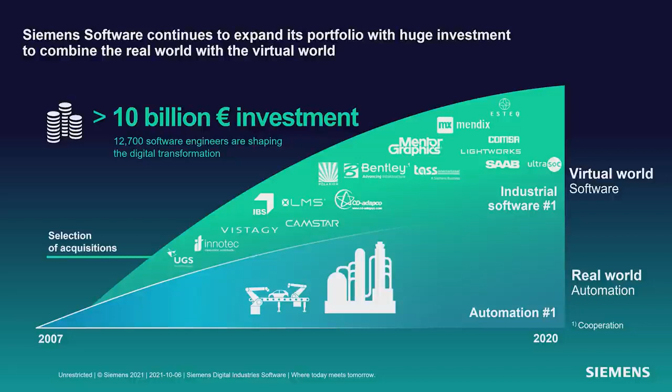One of the reasons we're able to do this is our investment. Over the past 14 years, we've invested more than €10 billion in bringing new functionality to Siemens. In fact, Siemens is one of the top 10 software companies in the world.

This allows us to bring you Xcelerator. Xcelerator is an integrated portfolio of software, services, and an application development platform that really speeds your digital transformation. So no matter what you're doing, whether it's mechanical, electronics, or manufacturing, we have you covered.

And it all starts with Solid Edge. Solid Edge is your on-ramp, if you will, to digital transformation. You're probably familiar with lots of Solid Edge capabilities for sheet metal, 2D drafting, etc. But maybe you need to go beyond that with the whole Solid Edge portfolio and Xcelerator, whether that's managing data, doing technical publications, simulation, or electrical—it's all there for you.

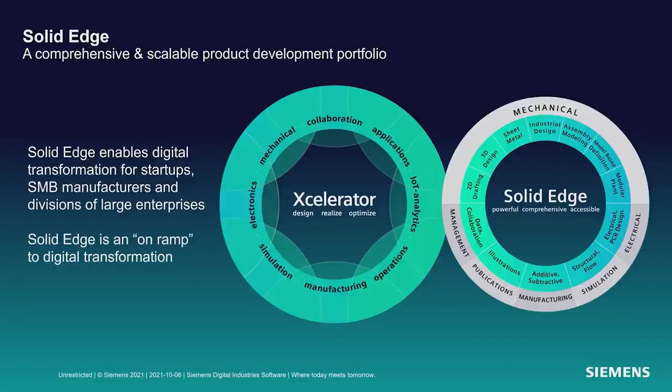And I love what Alan has to say: the software has a great holistic design approach, and that's what we like to see and how we can bring you more productive software.

So let's talk about Solid Edge 2022 itself. Solid Edge 2022: engineered to grow your business. There's so much in it, we'll only be able to cover some of it today.

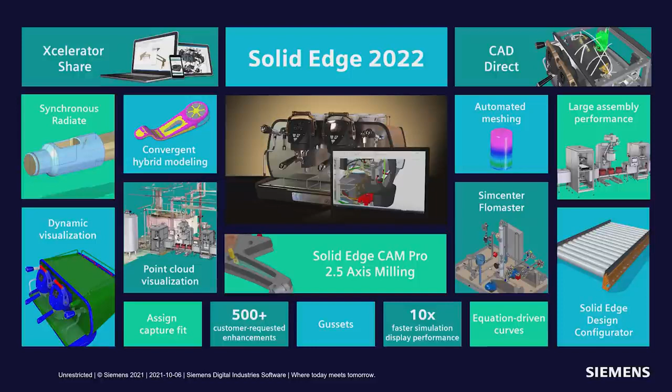Things like Xcelerator Share, allowing you to collaborate with customers and suppliers. Or CAD Direct, integrating CAD files directly from other systems into Solid Edge seamlessly. Point cloud visualization, for big scans of plants, letting you design your equipment in context of that scan. And Solid Edge Design Configurator, a whole new capability to configure your designs quickly and easily for your customers.

Now, as we go through our discussion today, we're going to be using two different data sets because there's just so much to see, such a broad range of functionality with Solid Edge. We'll be working with an espresso maker from Fiamma, a company based in Portugal, and also with a product from Bergner, a company based in Switzerland that makes chemical and pharmaceutical custom machinery.

So let's start by talking about mechanical design, and let's start with CAD Direct. CAD Direct lets you seamlessly integrate data from other systems into Solid Edge without translation, and automatically take updates.

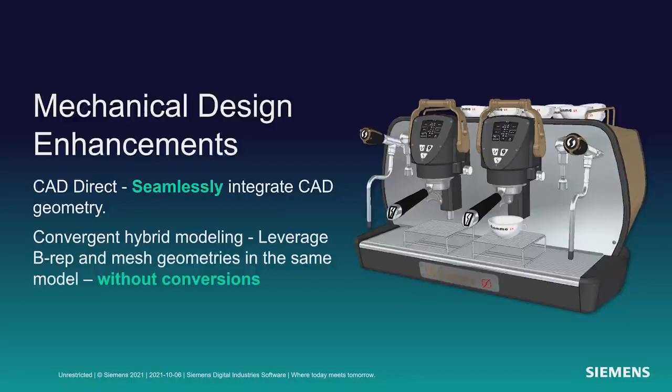We'll also talk about convergent modeling. We've been working on this technology for several years now, and it's getting very sophisticated—the ability to integrate mesh models with BREP or solid models in one seamless way. So let's look at that with Jeff now.

Thanks, Dan. First, we'll take a look at subdivision modeling. In this example, we will add support members to the base of the Fiamma espresso machine. The new subdivision bridge command can be used to easily connect edges or faces of subdivision cages and create a lofted structure between them. Here you see an example of that, where we'll select the faces of each subdivision model that we want to loft between.

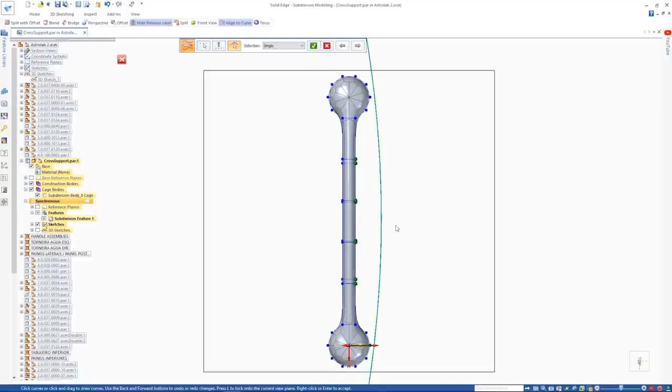Then we'll add the control curve to help us further define the overall shape. Next, we'll use the new Align to Curve command to further define the shape of the part, simply by selecting the cage vertices to define the direction and then picking the curve to automatically map those vertices to the curve. You can even sketch your own shapes and curves inside the context of the command, and even gesturing is supported for inking of your curves.

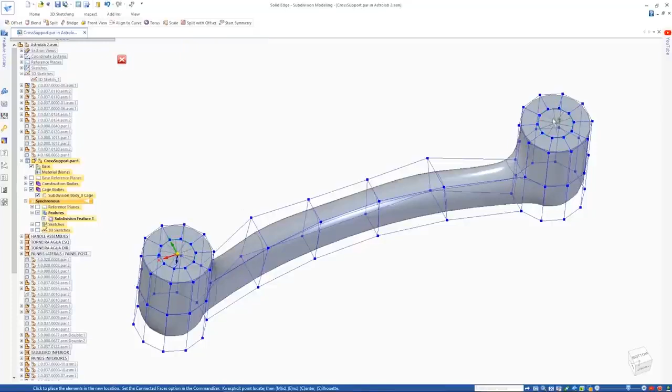Here we'll show another option called Split with Offset to add some pockets to support the rubber feet. A simple selection of the edges with an offset allows you to pull to create the pockets for those rubber feet. Next, we're going to replace the handle with a new design that's been 3D scanned.

This result is a mesh model that we import. We can visualize the mesh with the new Faceted Edge command. In this case, we'll clean up this model a little with the Remesh command.

Now faces have automatically been identified and the sketches are added to the planar faces of the mesh. We add a series of cutouts in order to reduce the weight and improve the appearance of the part. Notice the resulting geometry isn't faceted.

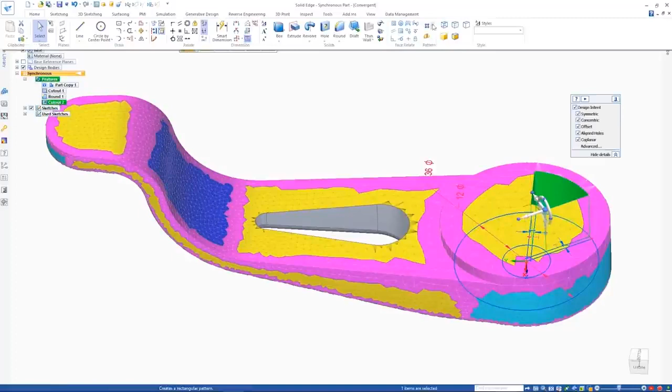Solid Edge now seamlessly combines mesh and B-rep geometry in the same body or part. We'll add additional cutouts to reduce the material. Once the cutout is complete, it can be patterned.

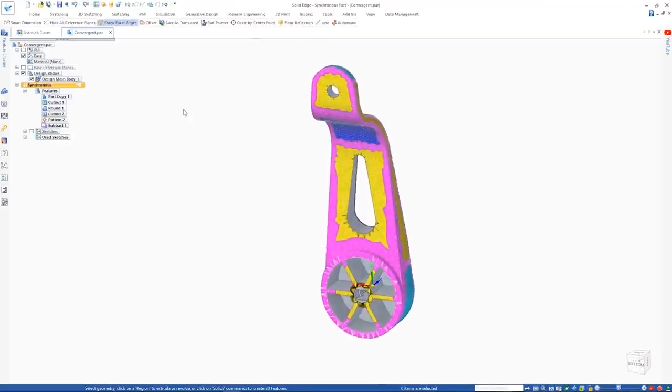Finally, we're back in the assembly where we'll replace the current handle with the new meshed handle. But you'll notice the mounting holes are missing from the component. This can easily be solved by doing a Boolean operation using the mesh model as the target and the components from the assembly as the cutting geometry. These new capabilities further enhance your ability to use mesh models in your design process.

Now we'll use the new component finder in the Solid Edge Pathfinder and search for the desired filter holder handle, which is designed as a family of assemblies. One of the versions is designed for a double espresso shot, the other is a single espresso shot.

Opening the drawing of this assembly, we'll use the new family of assemblies parts list to place a table and detail the parts used for each member.

Now we'll look at some enhancements to dimensioning in Draft. Dimensioning to virtual intersections or arcs of rounded edges is now supported. We can also choose to display projection lines to those intersection points.

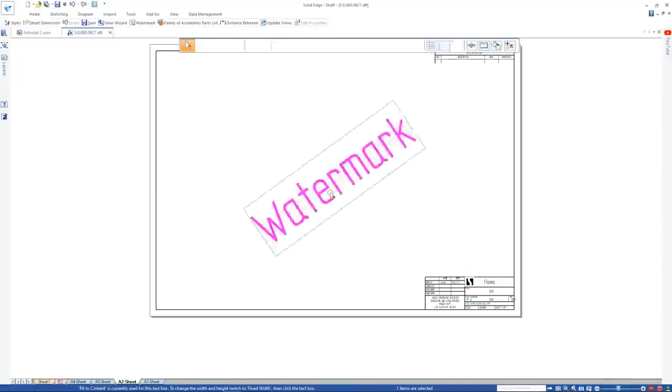Watermarks are also used to convey important information on the drawing. We'll change the existing one so that it retrieves the document status for the drawing property text.

The new CAD Direct command enables us to use foreign CAD data, geometry, and assemblies in Solid Edge directly without requiring any translation. The water boilers that you're looking at here were designed in NX. Once inserted into Solid Edge, they can be positioned just like any other assembly.

Since we need two of these, we'll simply copy one to create the second. Notice the boilers aren't quite in the right location. We'll go back into NX and make the changes needed to the mounting bracket such that they'll be in the right position. Since Solid Edge has associative links with NX, a simple update brings the changes in.

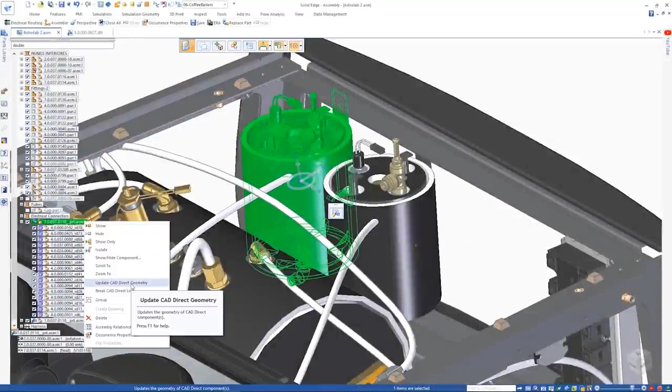Next, we'll look at electrical routing enhancements. Solid Edge now supports the display of bicolored wires, allowing us to change the display of this ground wire to be striped green and yellow. Various pattern types are supported as well, including single stripes, helical stripes, zebra stripes, and dashes.

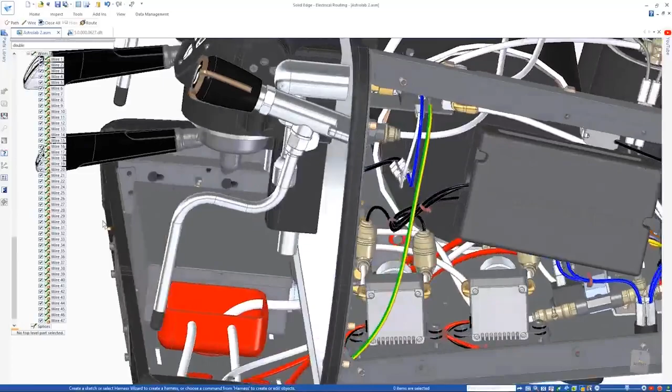And finally, KeyShot, the best-in-class rendering solution, also sees some impressive updates. Decals defined in Solid Edge may be automatically transferred, saving time and effort, which can be seen here on the logos and the cups in the digital scene.

Back to you, Dan. Thanks, Jeff.

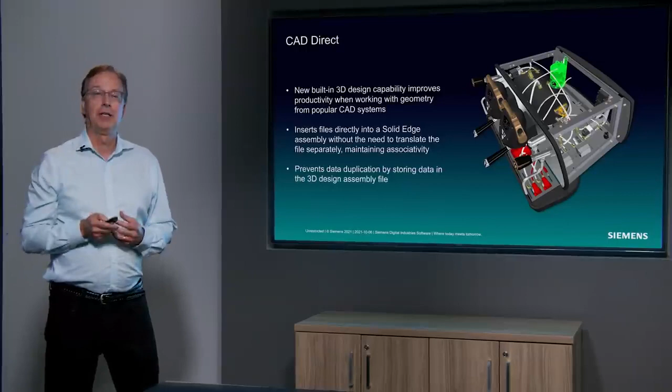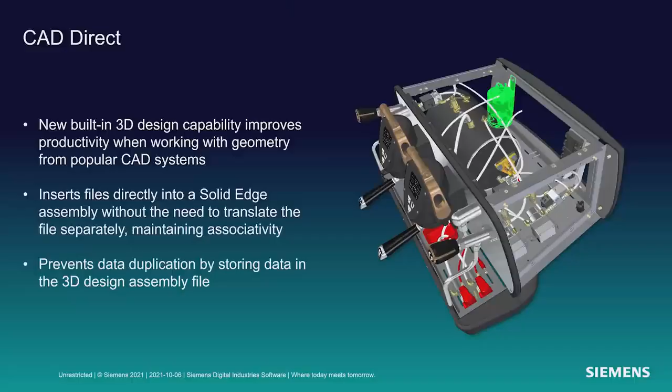Lots of amazing stuff in there, but I'm only going to highlight a couple things here that I think are real game changers. CAD Direct: you have the capability to get an NX assembly into Solid Edge directly, no translation. And when you make edits to that NX assembly, it comes into Solid Edge automatically. There's no extra files to manage. You don't have to worry about that.

It's all CAD Direct. And what about convergent hybrid modeling? You saw taking triangle meshes and B-rep solid models, pulling that all together into a single cohesive model, significantly reducing your design time.

Let's talk about some other mechanical design enhancements, some other great things in here. Point clouds: it's becoming fairly common to be able to scan an entire plant or factory and bring that data forward. We can now bring that data into Solid Edge so that you can design in the context of that factory or plant.

What about large assembly modeling? We see people first building parts, then assemblies, then whole factory lines. Assembly modeling in Solid Edge keeps getting faster and faster, best in the business. And synchronous radiate, an amazing new command within the synchronous modeling environment that allows you to deal with radially symmetric parts and edit those effortlessly. So let's take a look at that now, Jeff.

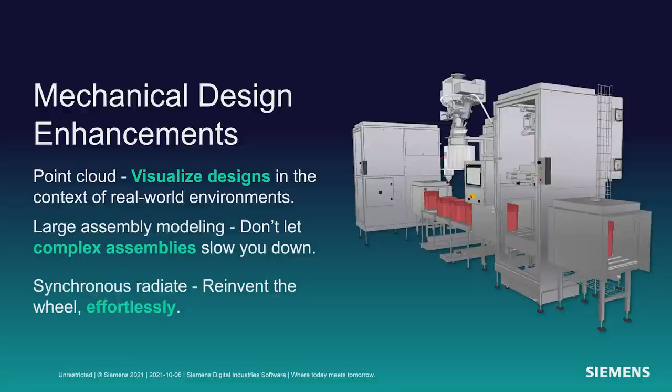The first thing we'll do is take a look at a new assembly preview mode. This mode allows you to very quickly open Solid Edge components and very large Solid Edge assemblies lightning fast. In preview mode, you can manipulate the view, show and hide components, and apply display configurations.

In this case, we'll isolate the most critical part of the model that we want to edit using a configuration. Then we'll simply tell the system how we want to open, and open only the components that are to be edited, saving you time and memory.

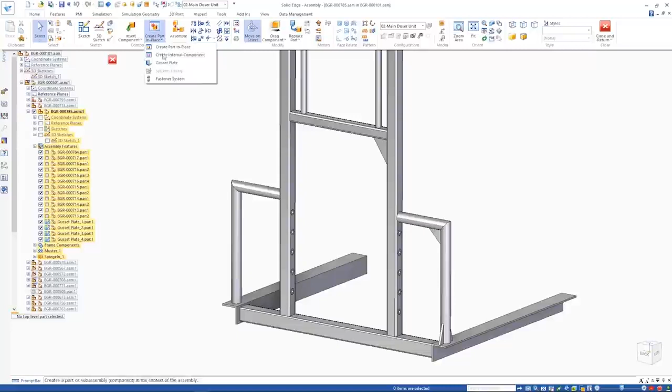Another time-saving enhancement is the gusset command. We now allow you to automatically add gussets to a frame structure. Here you can see the user interface. You can define these gussets in any shape and size that you desire. You simply select the frame element, position where the gusset is to go, and the system automatically creates the component there.

If we continue down the internal components theme introduced in the last release, we now allow you to create an internal component and actually create the model geometry directly inside the Solid Edge assembly. We've introduced this new assembly modeling capability that gives you the ability to create the entirety of a design without any need for an external file.

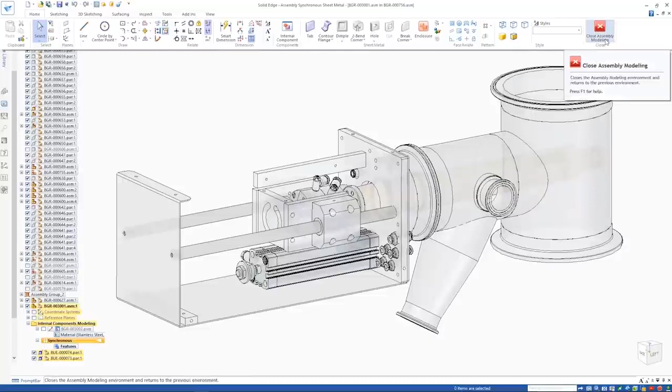Here we have a pneumatic cylinder which will be imported as an internal component. We need to add a bracket to this assembly, but since it's a purchased part, we'll just create this as an internal component, again saving the need for external tracking of files.

If you'll notice during sketching, a pop-up menu allows you to quickly access commands that are relevant to your selection. This is new for Solid Edge 2022.

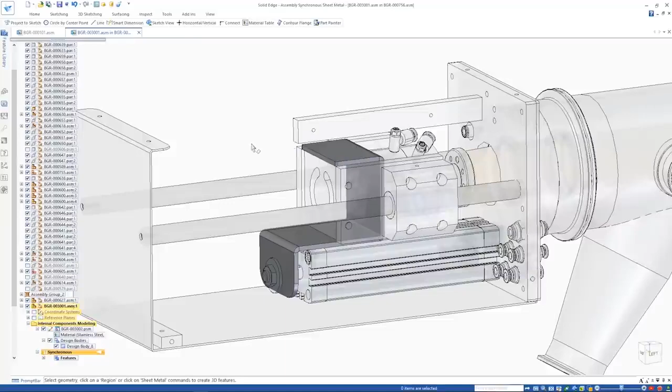So we've defined our sheet metal part. We also have to give it a material definition and a gauge definition. In addition, we're able to create geometry and reference the components from the assembly, whether they're internal components or real components in the assembly. So again, we're defining the material gauge for the sheet metal component, and we've defined this component completely inside the context of this assembly.

You're also able to drag the component, doing animations using both internal components as well as the real component combined.

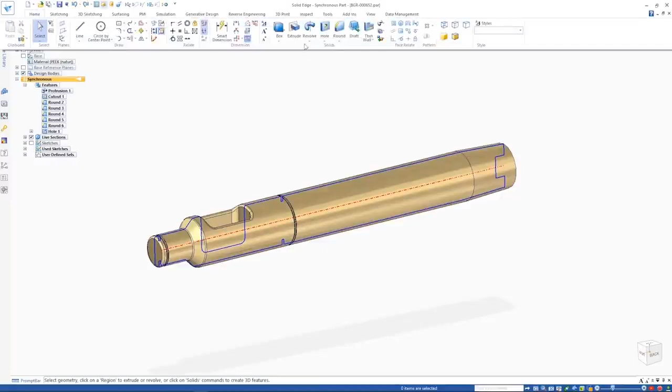The new component finder speeds up the process for locating parts within the assembly. You simply key in the name and it finds the list quickly. Here we found a shaft, and we use the new radiate command to edit the radius or the diameter of the shaft component. You simply select the shaft, putting the component in the select set that you wish to change, and then Synchronous does the rest.

In this particular example, we want to include the pocket in the radiate and the offset option. Simply selecting that pocket and including it allows that to be done.

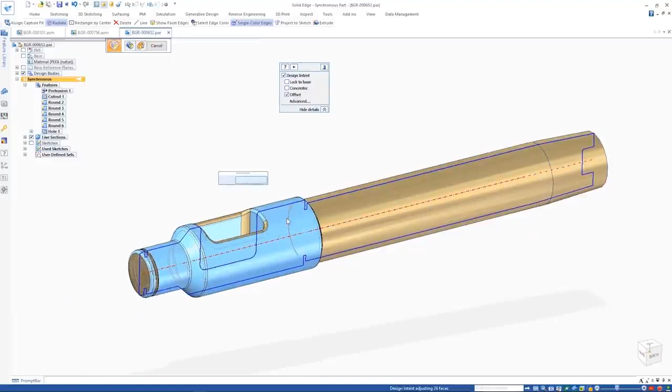A new Assign Capture Fit command allows relationships to be predefined on a component while in the context of the part. Here you can see that Capture Fit relationships already exist. We'll add a new Capture Fit to the collection and save it to the component.

When I place the handle into the assembly, all you have to do is select the component and select the mating components that you want to mate it to, and the handle automatically snaps into place. It's as easy as that. Here's another example where we have a handle that needs to snap to five new locations. Again, the Assign Capture Fit makes it easy.

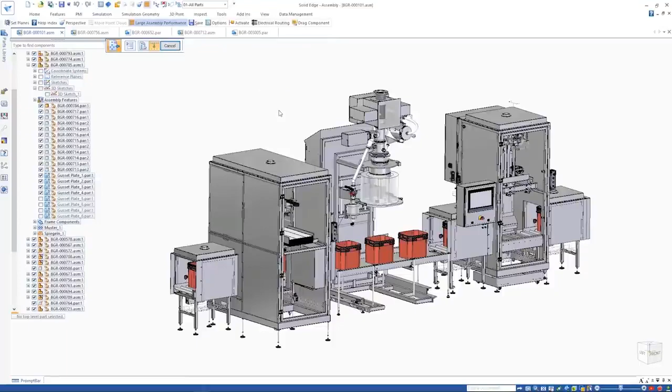Solid Edge now has the ability to place point clouds within the context of your design. This allows you to reference and visually indicate where your components will be placed inside a large assembly. Solid Edge supports multiple point types and then allows you to position your component inside the context of the plant design. The point cloud can be easily repositioned.

Clipping planes can be used. You can even measure to the location of the point clouds relative to your design. Here you see that the tank component was in the wrong position and it was moved to match the point cloud and the plant definition more precisely.

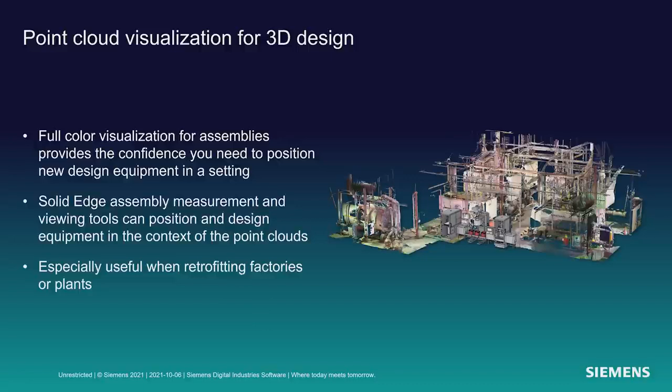And we see that our customers really love this new technology. So Benjamin at Bergner, for example, eliminates a lot of tedious manual effort. It's just so much easier with the new point cloud technology.

And what about large assembly modeling itself? An order of magnitude increase in large assembly modeling performance. So you have that preview mode where you can very quickly bring up the assembly, even very massive assemblies, decide what you want to work on, and then just bring in that bit of the assembly to really improve your productivity.

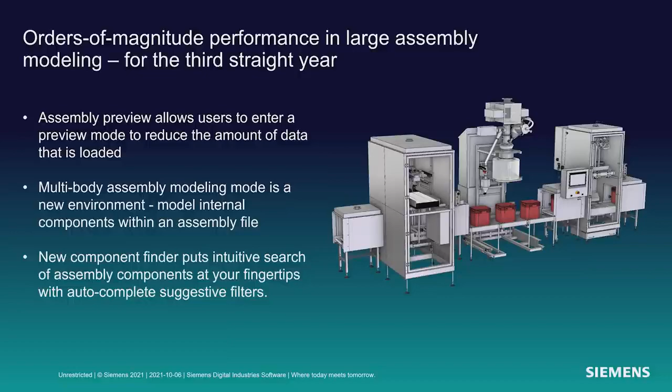And we see that folks are already taking advantage of this. Our beta customers have been using this, like Luca Carminati at CMS, doing much faster work and saving a lot of effort on their designs.

And what about synchronous revolve? Really amazing stuff if you're working on those axisymmetric parts. Being able to make edits without having to do any extra effort happens almost magically. Great stuff.

Okay, next up is Solid Edge Design Configurator. I'm very excited about this. If you're doing any engineer-to-order or configure-to-order type of products, the ability to very quickly change your designs and have new quotes very quickly. Let's take a look at it with Jeff.

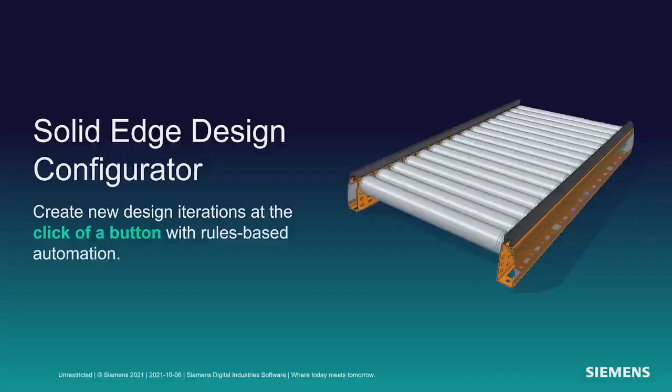Thanks, Dan. The new Solid Edge Design Configurator allows you to design multiple product variants directly in the context of Solid Edge. In this example, we'll configure a variety of conveyor designs. The first step is to select the component to be configured. The next step is to define the master input parameters of the configuration. In this case, it's the length and width of the conveyor plus the pitch of the rollers. Values can be easily edited for any parameter, and images can be included to help the end user identify the needed inputs when configuring the model.

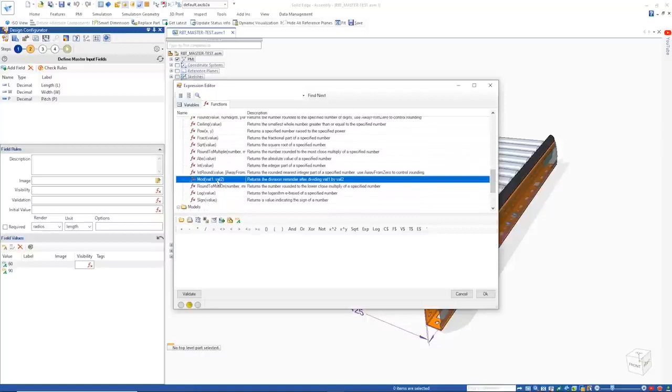Defining a new input parameter for the pitch of the conveyor, we will quickly configure the name, type, label, and render style to use radio buttons. The pitch value of the conveyor can be customized between 60 and 90. However, since different lengths of the conveyor require different pitches, visibility rules need to be applied. This is done by making use of a simple expression to define the intelligence. Here, the rules are being validated to ensure consistency and proper definition have been made.

Here, the function is going to be copied and pasted to allow you to easily reuse formulas without having to include them again. Skipping to the last step of the configuration, we can see the configuration form is properly created. Next, defining the rules for the process.

Here we have multiple rules to drive and configure the connectors at the bottom of the conveyor. We will use a combination of simple condition and expression rules and a truth table to work out the number of positions of the connector. All rules can be quickly validated.

Finally, we specify the actions to be taken. Here, variables are set and components are replaced to satisfy the input parameters.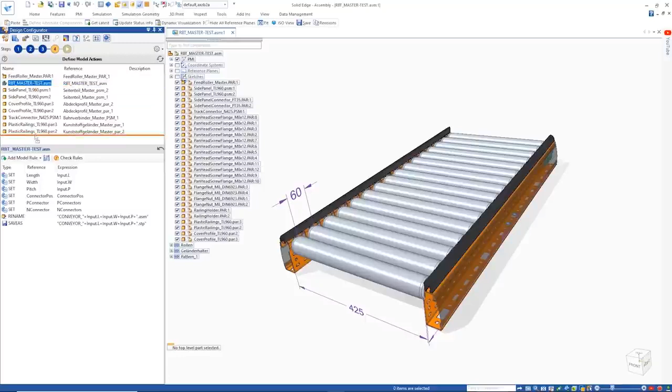A rename model action will ensure our final assembly will be renamed appropriately and also create the other necessary outputs, for example, a step file as shown here. Now we can run it quickly and create as many configurations as needed. A newly generated configuration can easily be shared with Pack and Go. The configuration logic is all stored within the CAD model. There's no need for any further plugins or external resources.

And with that, Dan, I'll hand it back to you. All right, thanks, Jeff.

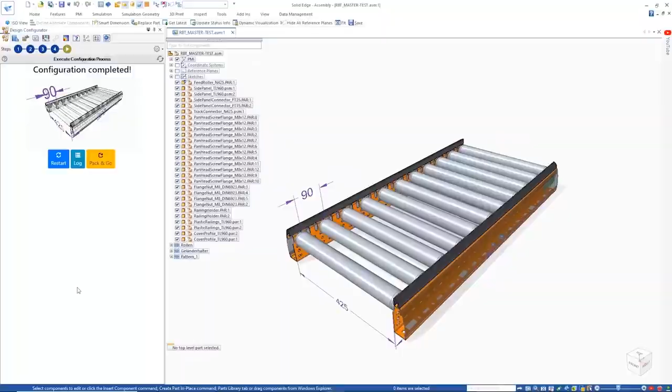So as you see, with the Solid Edge Design Configurator, you can accelerate your configure-to-order and engineer-to-order processes and create compelling sales proposals. You're also going to see that it really error-checks for you and creates a nice dialogue for your users to interact with so you can very quickly configure new products.

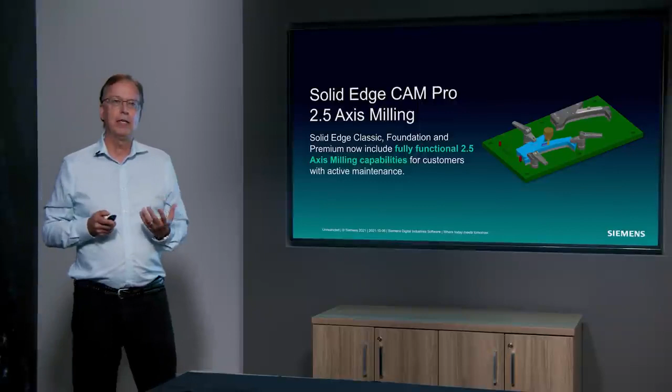What about CAM, Solid Edge CAM Pro? Tried and true technology developed over the last 40 years. A lot of users are using it today and enjoy the benefits of it. But what if that technology was available to all of you, all Solid Edge customers on maintenance? That's what we want to introduce to you today with Solid Edge 2022.

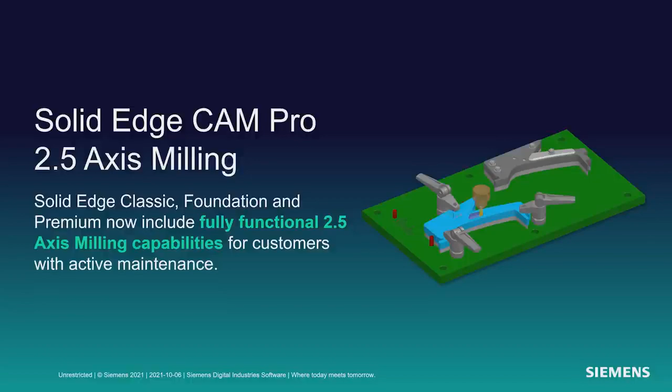Jeff. Thanks, Dan. Here we'll be using Solid Edge CAM Pro to create the manufacturing toolpaths for the rear legs of the Fiamma espresso machine.

First, we'll use the Solid Edge assembly tools to create the shape to represent the stock parts, and also the parts that form the fixture assembly, which includes the standoff plate as well as additional fixing holes from the standard database. We will also make use of supplier catalog in 3DFindIT to get the appropriate socket head cap screws to be used to fix the component in the fixture. So as you can see, Solid Edge is a great CAD for CAM tool.

We'll need to machine this in two separate steps. Step 1 is to mill the pocket and drill the holes, and step 2 is to machine the profile.

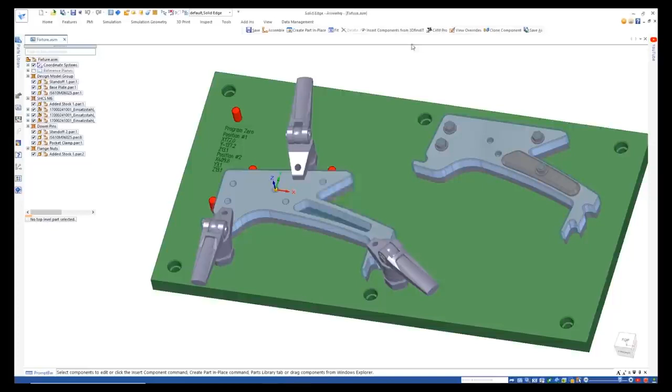One click will send the entire assembly to the Solid Edge CAM Pro application. Associativity is maintained to the complete assembly, so if there are any last-minute changes, we can quickly update them and continue the NC programming process.

New for Solid Edge CAM Pro is the ability to create adaptive roughing toolpaths for 2.5-axis operations. This is included at no additional cost. These are faster than traditional toolpaths and extend the cutting life of your tools.

Notice the advanced graphic capabilities for validating your toolpath.

Here we'll create spot drilling operations for the 5 holes in the support. Notice the graphical pop-up hints that help us with operation selection.

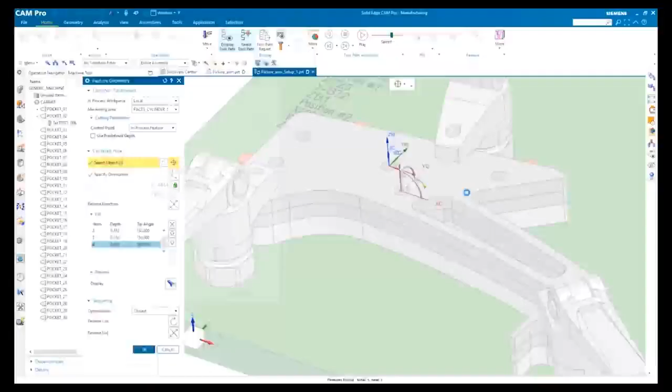Graphical helps are also available for geometric selection. Each time we select a hole, we get a preview of the machining that will take place. Again, at any point in the process, we can get visual feedback on our decisions.

Now that our CNC program is complete, let's run through the whole visualization process. Notice you get to completely visualize the entire machining process before committing it to machining.

Of course, no job is finished until it has been post-processed for a specific machine. That's where PostHub comes in. It's an online database of over 1,200 post-processors. You can easily filter and find exactly the one you need. Also, PostHub is constantly updated, bringing you the most recent tools.

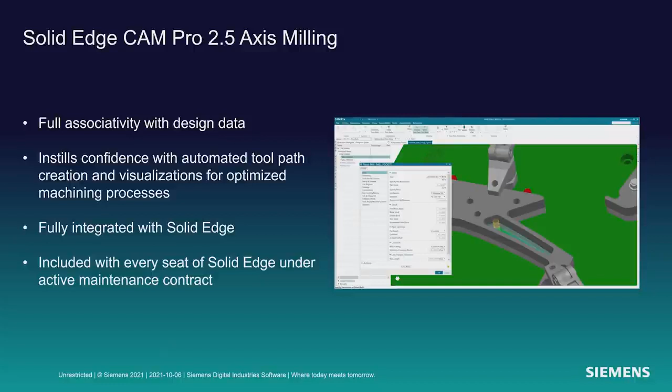And Dan, with that, I'll turn it back over to you. All right, thanks, Jeff. I'm really excited about this. There's a great heritage in Solid Edge CAM Pro and our machining technology over the last 40 years. Many people enjoy that technology, but now every Solid Edge user who's on maintenance can enjoy that technology and work with Solid Edge CAM Pro.

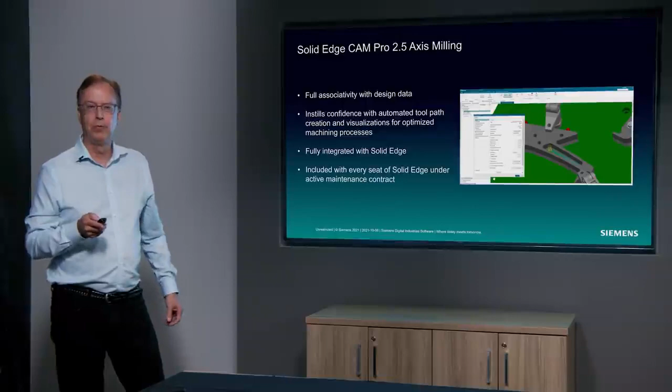Next up is Xcelerator Share. I'm super excited about this. It's a functionality in Solid Edge that allows you to collaborate with colleagues, suppliers, customers very easily. Nothing for you to set up, works on all sorts of devices. So let's take a look at that, Jeff.

Thanks, Dan. Xcelerator Share allows you to import your CAD models into a secure cloud location. Within that context, you can view, rotate, show/hide, do 3D sections, and even do measurements and markups. Here, a reviewer has identified the need for some change in the design.

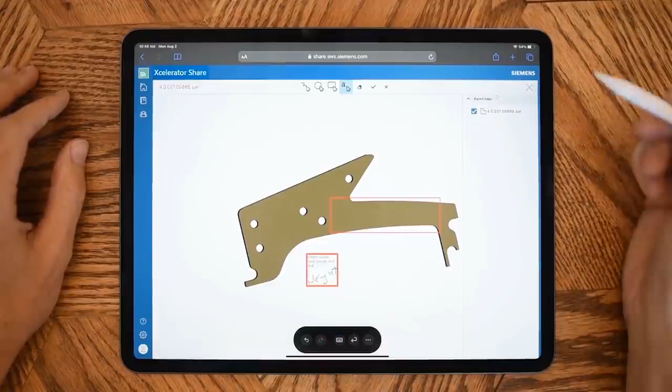The location of the change is identified by a sticky note and a place describing the needed change. Xcelerator Share offers maximum traceability, as all markups are recorded, enabling conversations back and forth on any of the issues you're tracking. It also records who made the markups and when. We can also easily go back to the markups at any time.

Simply save your markups and send them to the designer for review.

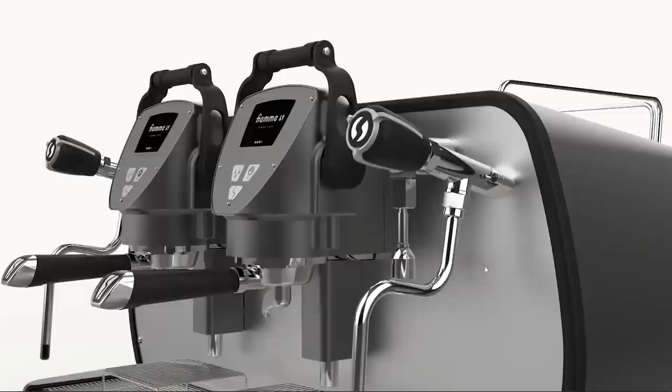With Share, you can also directly connect to Solid Edge, synchronizing your data from your desktop to the cloud. Here we have the same project on our desktop, represented simply as a folder. Any data that we have in this folder will get synchronized in the background.

In Solid Edge, we can securely sign in to Xcelerator Share and see those same cloud-based projects. The Espresso machine can be opened and we can go right to work on the part in question. The designer can easily access that same markup in the cloud directly from within Solid Edge.

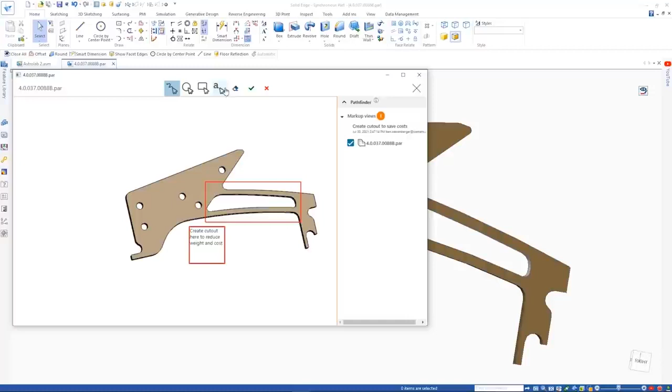Once completing the change, another markup continues that two-way conversation and collaboration with other stakeholders so that the issues are tracked appropriately.

Another great feature of Xcelerator Share is the ability to share a project with anyone. Simply enter the email address of the person with whom you'd like to share and choose their access permission level. Here we can choose View, or View and Download, or Edit and Download, depending on how you want to protect your intellectual property. We'll share this design with one of your colleagues and our customers and give them the appropriate access.

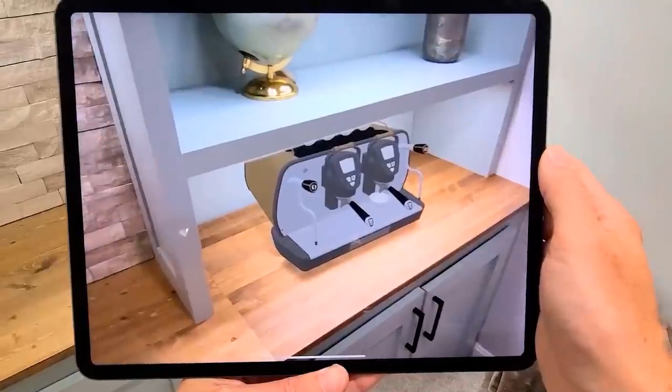Finally, with the Share Augmented Reality feature, you can see exactly how your designs will look in the real-world environment. Snap the design onto any surface seen in the camera lens at the correct scale. Finger gestures can be used to manipulate the model and easily visualize what your design looks like in a real environment. So back over to you, Dan.

Thanks, Jeff. All right, Xcelerator Share. Really great stuff. Next generation cloud-based collaboration that allows you to work inside your company with colleagues, or work with suppliers, work with customers. Nothing for you to set up. Works on every device. So whether you have a Mac or an iPad or a Chromebook, it works on all those devices with no special setup.

And you saw the ability to write notes that are automatically converted to text, and share those markups. Very exciting stuff.

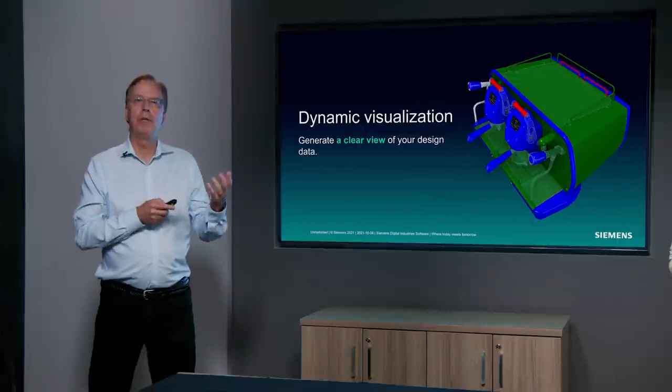Next up is dynamic visualization. You make complicated products, large assemblies. How do you know which parts are from which supplier, or which parts are of what material? Dynamic visualization will help you with that problem. Let's take a look at that now with Jeff.

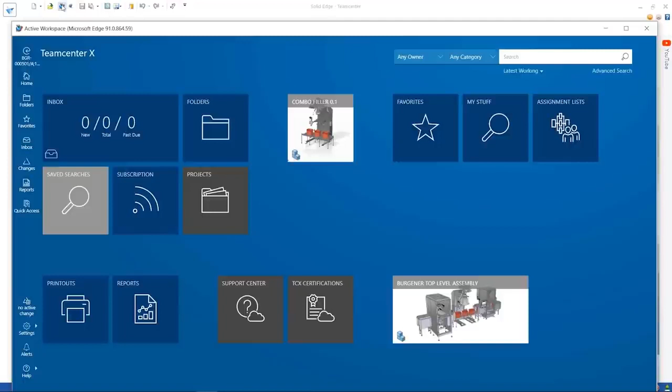Thanks, Dan. Dynamic visualization gives you great capabilities to generate visual reports of your assembly. So what we'll do here is open a Solid Edge assembly using Teamcenter Active Workspace, and create a visual report based on the component supplier and material definition. The first thing you'll do is add columns to the user interface that you want to filter on. Here we've added suppliers and material, so for each of those we'll filter on the particular material and supplier we're interested in visualizing.

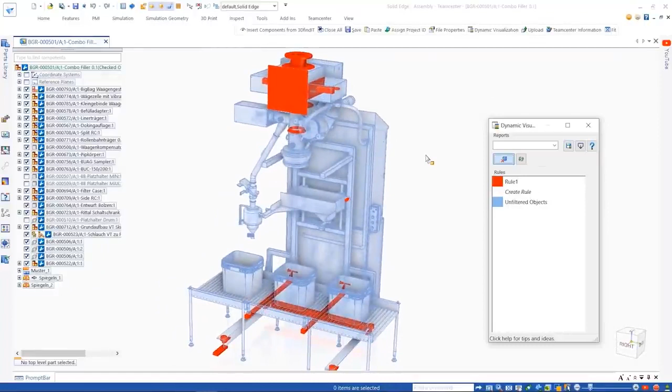Once the rule is created, you simply apply the rule and the model changes display to show you the rule definition. Here you can see in red the components based on that supplier and material selected. You can also export these rules and import them into various assemblies.

Here we have a rule that allows us to identify which user created which components. We'll modify that rule to allow us to identify work in progress as well as components created by Pat. We can highlight those, select those, and then go into edit mode. Here we'll see we need to add a warning light to this box.

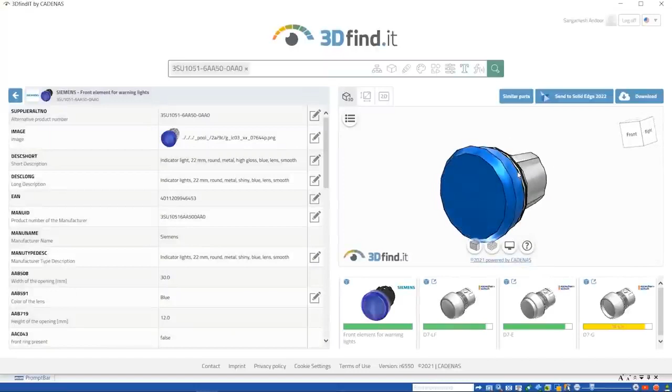We use 3D Find It to find the particular light from the particular supplier that we want. Once we've identified the right one, we'll generate the component in Solid Edge. But in this case, the component already exists in the Teamcenter database, so instead of replicating it, we'll simply reuse what's already there.

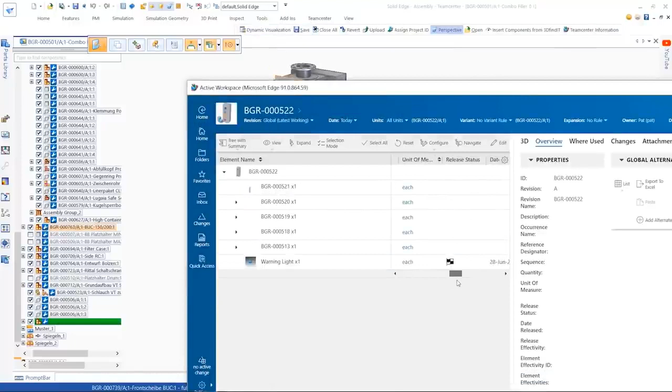Also in Solid Edge 2022, we were able to take advantage of the project definitions within Teamcenter. Here we can see we've assigned the components to a particular project in Teamcenter.

The Solid Edge built-in data management also supports dynamic visualization. Here again, we'll display the assembly coloring based on material type to ensure that we have the proper materials throughout the model.

So again, the rule is applied, visually it's displayed, and you'll notice that the red handles should be green. Those should be stainless steel and not aluminum. So we'll send those back to the designer to be reworked and the proper material applied.

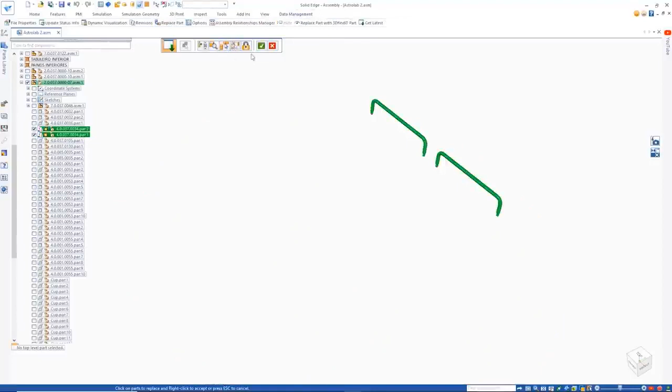Once applied, we can then do an auto update of the status, and the system will automatically show us the status and update to get the latest component. In this case, the handles are updated with the proper material. We will rerun the same rule, and you'll see that now the handles are green and therefore in the correct material.

Another nice enhancement is that we've modernized the file properties dialog. You can see here it looks much more user-friendly and lets you easily create new custom properties as shown here.

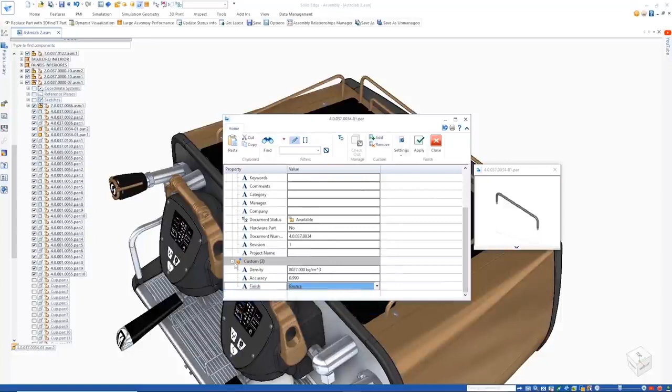This next example will use replace part with 3D Find It. 3D Find It has the ability to take a component and use that component's geometry to search the catalog database for similar components. Here, once the component is found, we identify the supplier that we desire, and with a few simple clicks, that component is inserted into the assembly, replacing the previous geometry.

And lastly, we've added Pack and Go directly to the Windows Explorer UI, making it easy for you to share your data without having to open the assembly within Solid Edge. And that's it, Dan. Back to you.

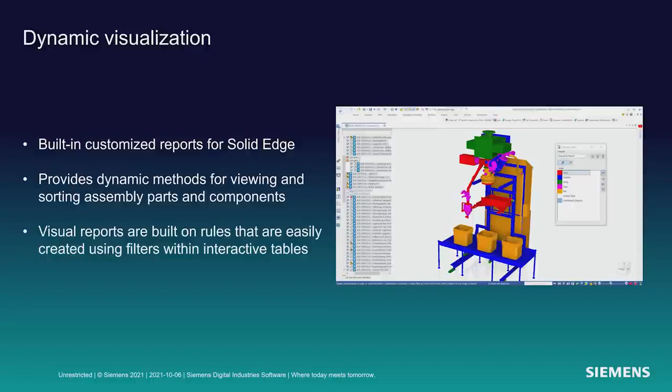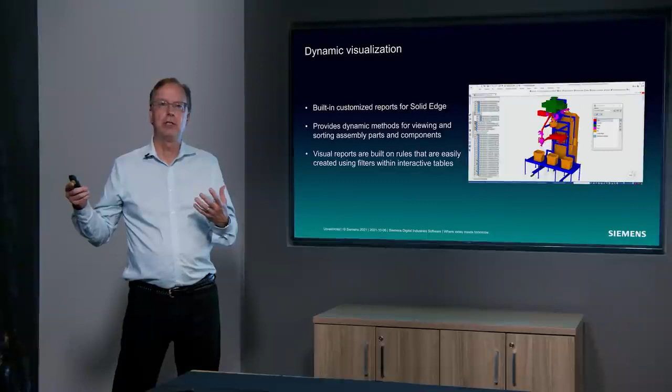All right, thanks so much, Jeff. So many good things you saw in there with 3D Find It and the ability to replace components, search directly using geometric shapes, and so on. But I want to highlight to you this dynamic visualization. Being able to say, what supplier do I have for the different components? Color code for me all the things that are stainless steel. Color code for me all the parts that are in work. Amazing technology that would save you a lot of time and money.

Next up is Solid Edge Simulation. We have some great enhancements in there, some game-changing enhancements in terms of the ability to remesh parts using the body mesh command, and some other great tools. Let's take a look at those, Jeff.

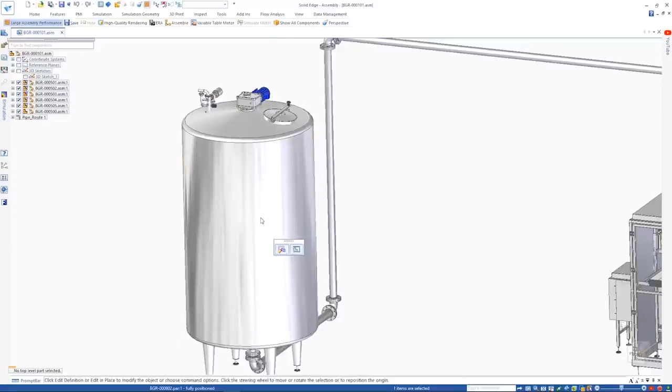Thanks, Dan. We'll start by looking at a new boundary condition allowing the user to apply hydrostatic pressure to a model. So we'll apply a configuration that gives us the geometry of interest. Here we want to look at this tank on the left and do an analysis, assuming that tank is filled with liquid.

So we'll create a hydrostatic study, and in the definition of the loads, we'll use the new hydrostatic pressure command. All you have to do is identify the surface to apply the load, identify the depth of the liquid in the tank, and then provide the density of the liquid within the tank. Solid Edge will do the rest.

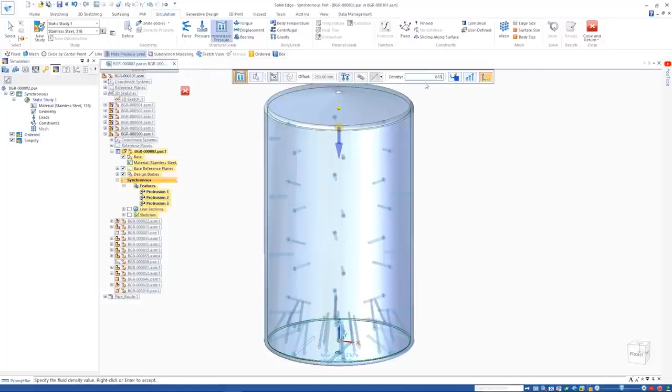To finish the analysis model, we'll apply constraints to the bottom of the tank and then perform the meshing and analysis as needed. Notice on the new mesh dialog a body mesh. This is proprietary technology from Siemens that does a really good job meshing complex models. Some things that couldn't be meshed before can now easily be meshed much quicker and much more reliably than in the past.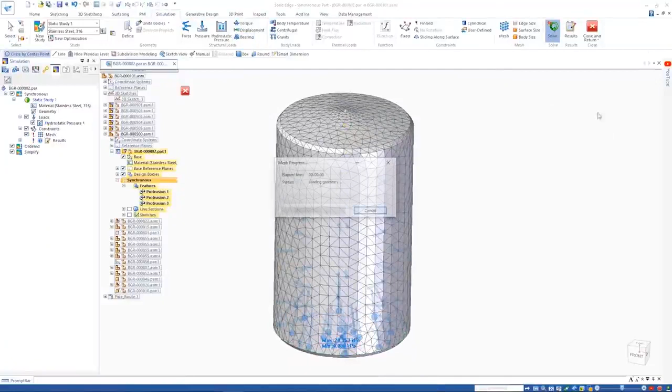So here you see the result of the hydrostatic pressure load in this tank. We'll change the liquid level in the tank and run the analysis again just to validate that this tank will withstand the pressure exerted on it in production. There you see the animation of the stresses, and they show up in the obvious place at the bottom of the tank where you might expect.

Another great enhancement we have in simulation for Solid Edge 2022 is improvements to beam meshing. Here we're taking a frame structure and creating beam elements for the finite element analysis. Notice that the rigid connectors were automatically placed. We've improved significantly our ability to create those connectors automatically without any user intervention. Here the user has selected the bottom and changed some of the parameters to get the rigid connections correct. The bottom of the frame is then fixed, loads are applied, and the analysis is run.

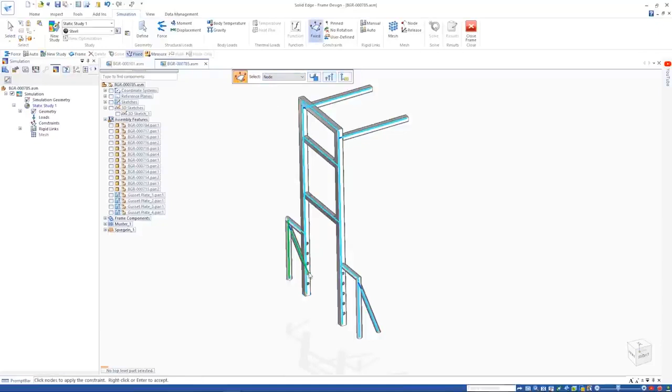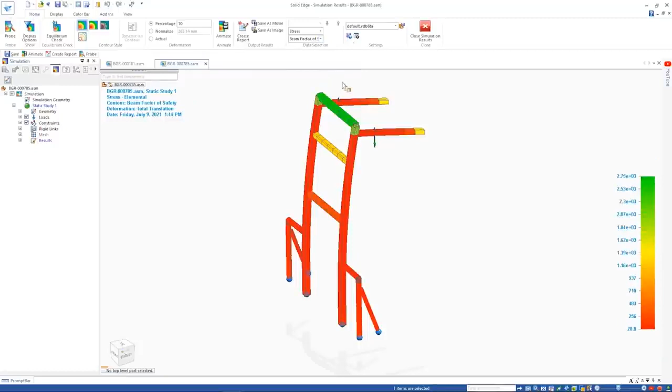Once complete, you'll see some enhancements to the output, to the post-processing for this model. We can now post-process and display contours using von Mises stress, and we've also improved factor of safety stress contours based on those same von Mises stresses.

Now back to the assembly, we're going to do another analysis on the pin within this assembly. You notice this pin is a mesh model. Simulation can now perform analysis on mesh models. You simply apply the boundary conditions, the loads and constraints where needed, and run the analysis. Here you see the result for the pin on this mesh model.

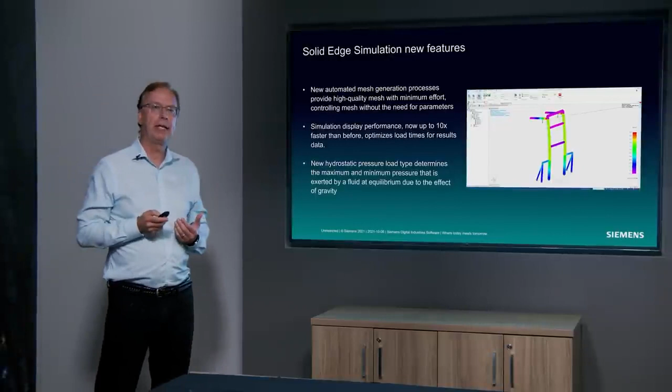Lots of great new things in there. Obviously, the hydrostatic pressure load takes a lot of work out of the process for you. The way the beam elements are automatically connected together, great stuff. But also that body mesher - you can take a mesh that's very irregular, very difficult, and remesh it with the body mesher. It's a game changer for analysis.

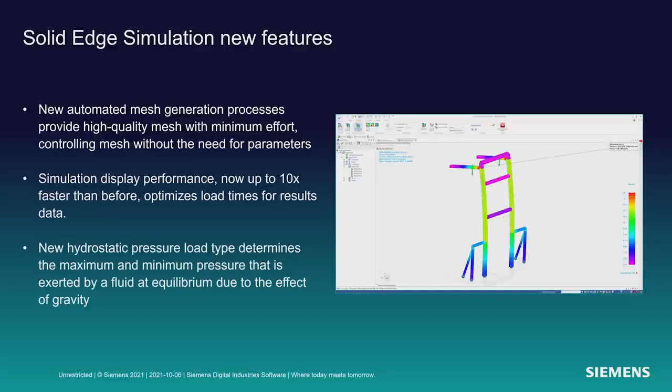Next up is Simcenter Flowmaster for Solid Edge. If you're doing any types of products where you have piping and you need to do analysis on the piping or design on the piping and the flow within the pipes, Simcenter Flowmaster for Solid Edge is for you. Let's take a look at how it works with Jeff.

Thanks, Dan. The unique CAD to Flowmaster technology extracts the geometry from a Solid Edge assembly and automatically creates the corresponding fluid volume that exists inside the pipe runs and components. During the process, a face can be selected to give the length scale and convert the system to a subsystem.

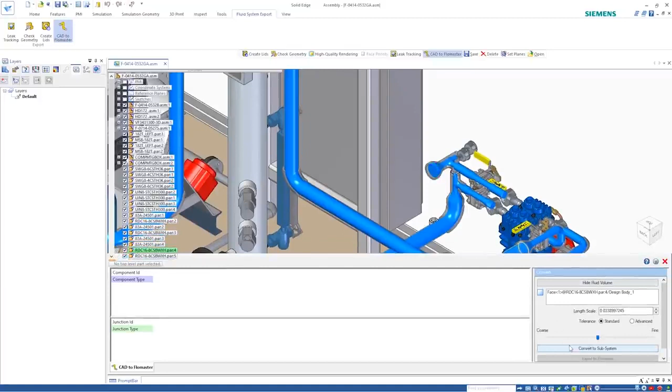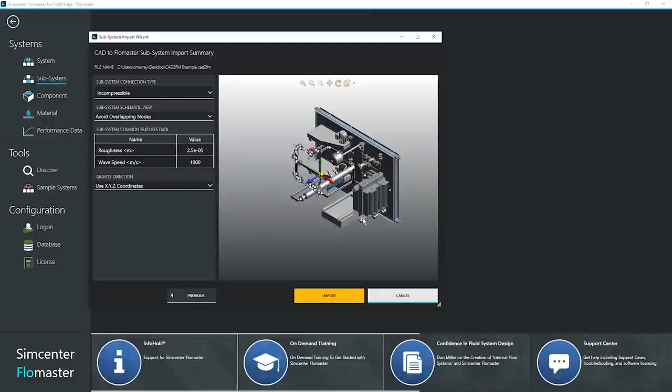The abstraction process is fully automated. There is also full control over the fidelity of the model, which can be adjusted with the slide bar. Individual elements can be inspected, deleted, and merged. Once the network configuration is defined, the geometry can be exported to Flowmaster. Following export, the file will be saved for reuse, then automatically opened in Simcenter Flowmaster for Solid Edge in the Subsystem Import Wizard. The CAD geometry, centerline, and component connections can be seen in the wizard, and the model can be rotated to the desired projection when the network is created.

On selecting Import, a new subsystem will be created for review. The entire subsystem can be used to create a model, or individual pipelines can be extracted into their own subsystem. For a flow analysis of this model, we are going to extract the pipe from the two compressors to the center vessel. We create a second subsystem from the first and save it in the subsystem catalog. We'll now add the subsystem to a new network and specify the boundary conditions using pressure sources. We'll specify the compressor outlet pressure and vessel inlet pressures.

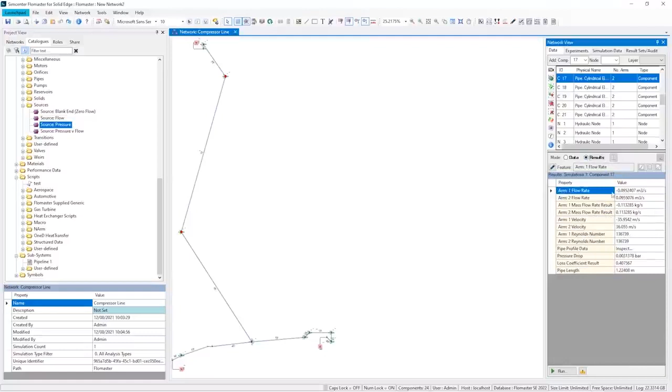For this low pressure system, we'll specify air as the working fluid and run a static simulation. Following the simulation, we can look at the results for individual components or look at the whole system using network visualization. With this, we can quickly oversee flows, pressures, and velocities.

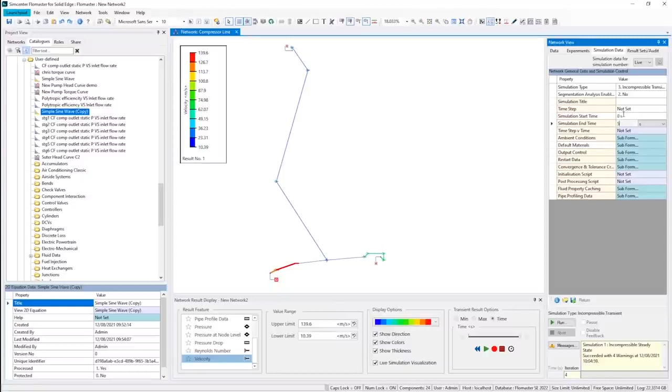Next, we'll look at the effect of a pressure pulse from the compressor on the system. We'll specify curves defining the pressure pulse and the source, and then run the transient simulation. Following the simulation, we'll look at the flow into the tank, where we can see the effects of the pressure pulse from the compressor. Then, moving to the compressor outlet, we can enable transient visualization to see the variation in flows, and that the larger flow is from the left-hand compressor. And back to you, Dan.

Thanks, Jeff. Some super advanced technology there that we're happy to bring to the Solid Edge community. This is one of the advantages of the Xcelerator portfolio, the ability to bring advanced technology to you.

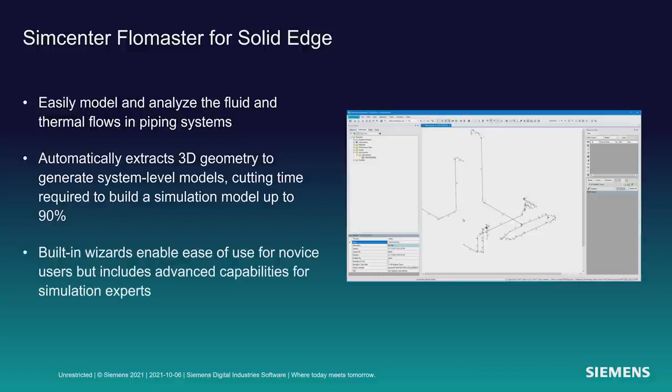Great capabilities here in terms of easily modeling and analyzing the fluid system, with great extraction of the center lines automatically from the 3D geometry, so you can go straight into that analysis and see what's going on with your system.

So that was a feature-packed release, right? We went through a lot of stuff, many things in Solid Edge 2022 that are going to help your business. There's simply so many amazing things in there, the number of improvements are enormous, and I think that's been echoed by all of our beta customers.

Everyone is saying this is the best release of Solid Edge ever. And so much more. We're able to show you a lot of great things in Solid Edge 2022, but there's so much more to see and learn about, and I invite you to do that.